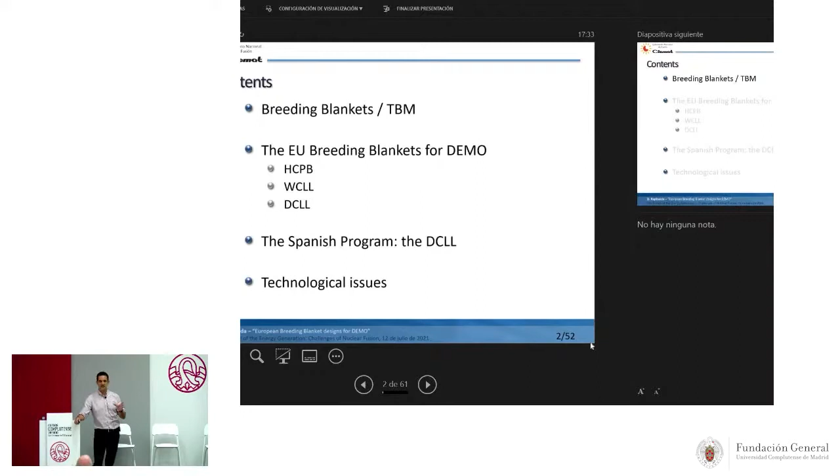So, what is quite important of this reaction? Deuterium is commonly found in nature as a percentage of hydrogen in water. So we have a lot of deuterium on Earth. We have this fuel for more than 10 to the 10 years. So no problem with that. But we have an important problem with tritium. Tritium is mainly an anthropogenic element. This means that it needs to be fabricated. We cannot find tritium naturally on Earth. We only have some small amounts of tritium in the high layers of the atmosphere by the action of cosmic rays. And the little production of tritium in the world comes from fission reactors and spallation sources.

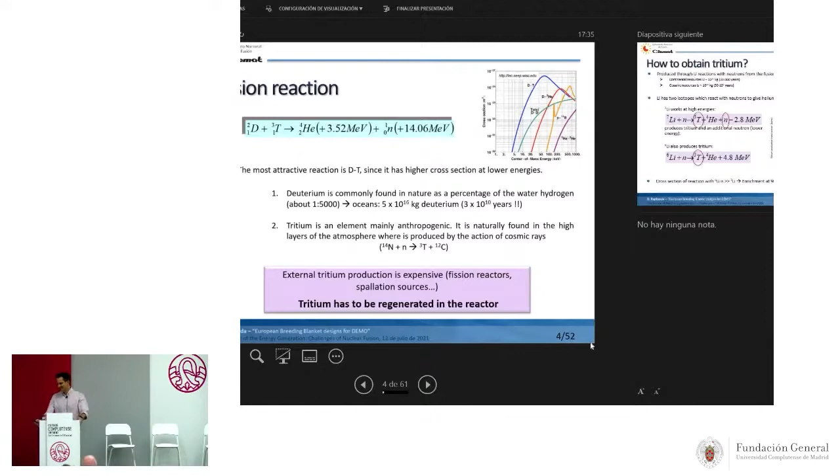So, for that reason, tritium has to be regenerated in the reactor. This is a key point that you have to keep in mind. But how to obtain tritium? What we do is to produce tritium through lithium reactions with the neutrons coming from the fusion reaction. These neutrons are of 14 megaelectron volts, so a very high energy, and this is also quite important. And why lithium? Because, firstly, we have a lot of resources of lithium around the world, both in the continents and the oceans. And secondly, because lithium has two isotopes with a good cross-section for producing tritium. This is the main point.

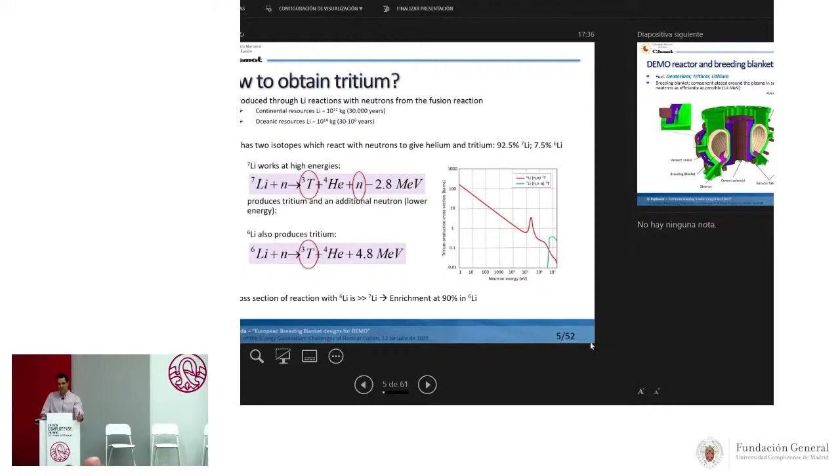And lithium-6 also produces tritium, and what is interesting here is that the cross-section of lithium-6 is really large. It's large at low energies, so this is good. But the problem, as I mentioned, is that naturally we find mostly lithium-7. So we need some enrichment in lithium-6 of this fuel.

Okay, so summarizing, the fuel that we use in fusion is deuterium, tritium, and lithium. We need a small amount of tritium to start the operation of the reactor, and after that we operate with lithium. We have deuterium plus tritium, we generate neutrons, and these neutrons impact, I will explain where, and we will produce tritium again. So, the breeding blanket.

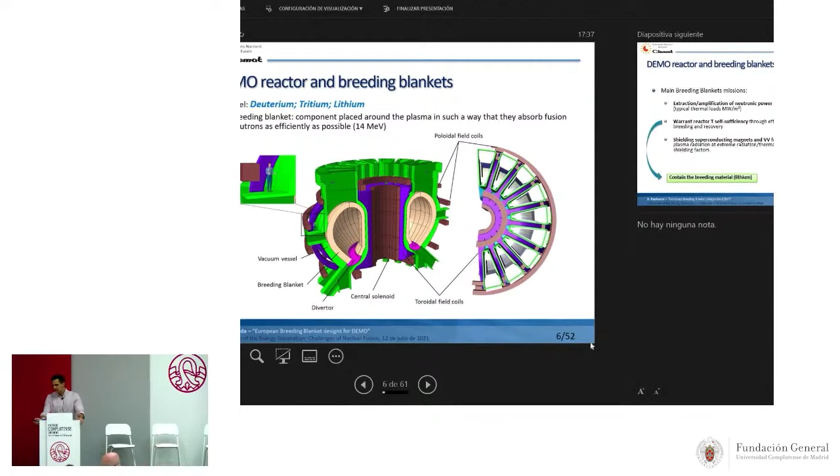In this slide, okay, it doesn't matter. Okay, this is a fusion reactor. This is how it looks. In the center of the reactor, we have the plasma, the deuterium and the tritium, and immediately surrounding the plasma, we have the breeding blanket.

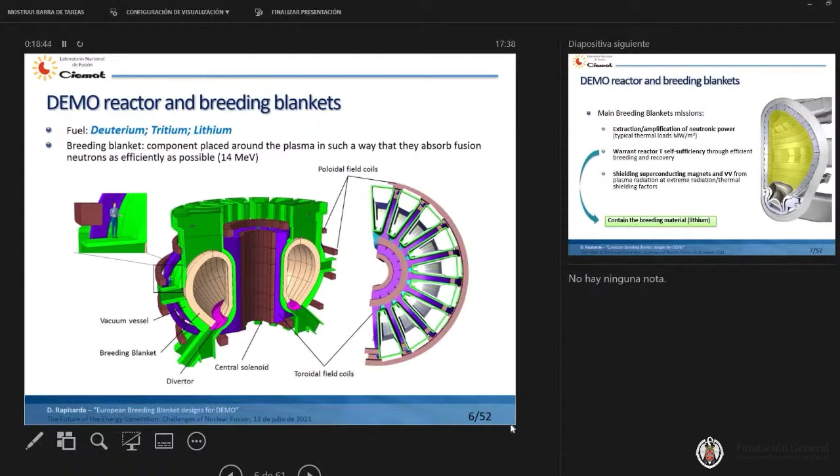This is the first component that the neutrons see, and this is quite important. So the neutrons produced inside the vacuum vessel, which is this green part of the reactor, go directly to this part, which is the blanket. This is the breeding blanket. And after that, we also have some magnets to produce the magnetic field and so on. Tomorrow in the talk by Joaquin Sanchez, you will obtain more information about that. But this is important: the blanket is the component which is placed surrounding the plasma.

So, the main missions of the blanket. The first one, and quite important, is to extract the power of fusion in order to produce electricity. This is the most important. And secondly, because we have this lack of tritium in the world, the second important objective is to produce tritium via lithium reactions with the neutrons. These are the two main functions. And we have an additional function, which is the shielding of all the components behind the blanket, in this case, the vacuum vessel and the TF coils, the toroidal field coils.

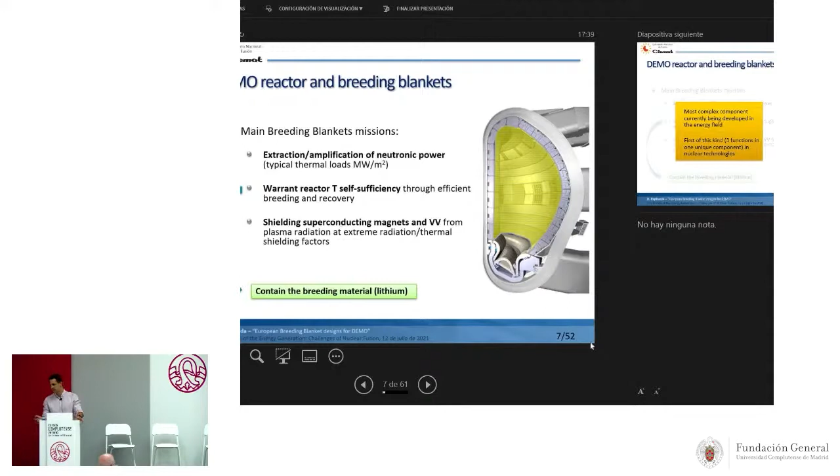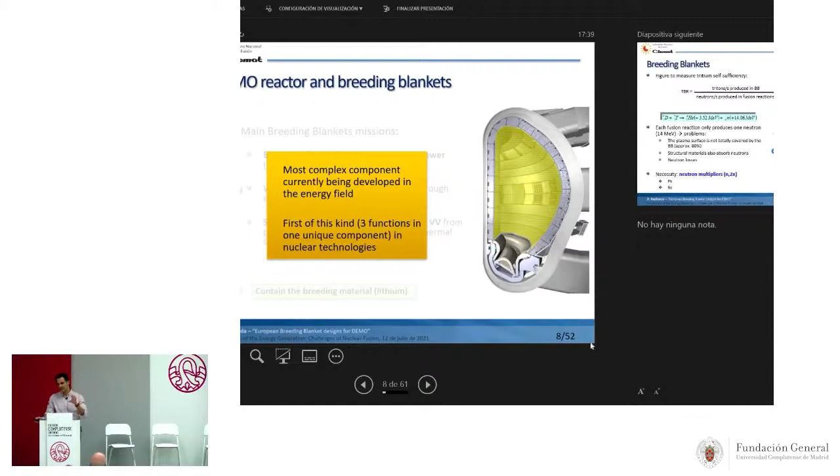So, since we have to guarantee the tritium self-sufficiency, remember this word, self-sufficiency, we want to be self-sufficient with the fusion reactions. The blanket must contain the breeding material, in this case, the lithium. And these three functions make the blanket the most complex component in the energy field. There are other components in other energy fields with some of these functions, but this is the only component that has the three functions in the same component, and this is quite important.

Okay, the breeding blanket and the TBR. The TBR is a number that we use to measure this tritium self-sufficiency. The TBR is the tritium breeding ratio, the amount of tritium that we produce inside the blanket versus the neutrons produced in the fusion reaction. It's a really important number, and you will understand easily why. I said that the deuterium-tritium reaction only produces one neutron, and this neutron has to directly impact the lithium blanket. And in this reaction, we only produce one tritium. So we have one neutron, one tritium.

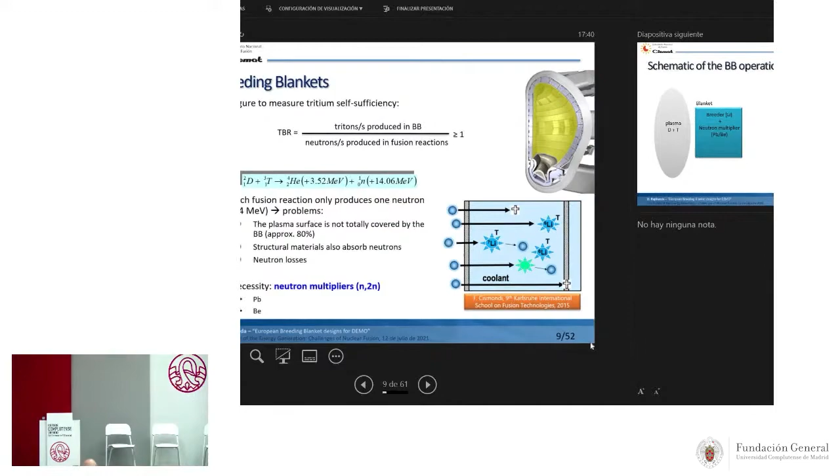This means that if we lose some neutrons on the way, we never will reach the self-sufficiency of the reactor. This is quite important. And we are going to lose neutrons. Why? Because the first thing is that, as you can see in this picture, the plasma is not completely surrounded by blankets. This is the blanket, and we have other components such as the divertor, or we have holes to install the heating systems or the diagnostics and so on. So at the end, we only have 80% of the surface of the plasma covered by blankets, and this means that we never will reach the self-sufficiency.

Second point, the structural materials also absorb neutrons. These neutrons will go directly to the steel, and the steel will heat up, and we lose these neutrons. And the third point is that we have neutrons with high energy, and these neutrons can pass through the blanket without any interaction with the lithium. So at the end, we never will reach the self-sufficiency only with the lithium. And for that reason, we need in the blanket what we call neutron multipliers, which simply is an element which can absorb neutrons and produce additional neutrons. And in our case, we use lead and beryllium.

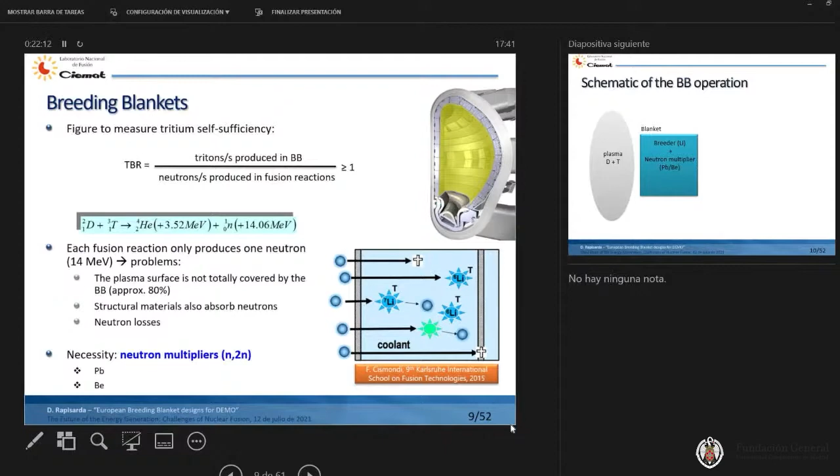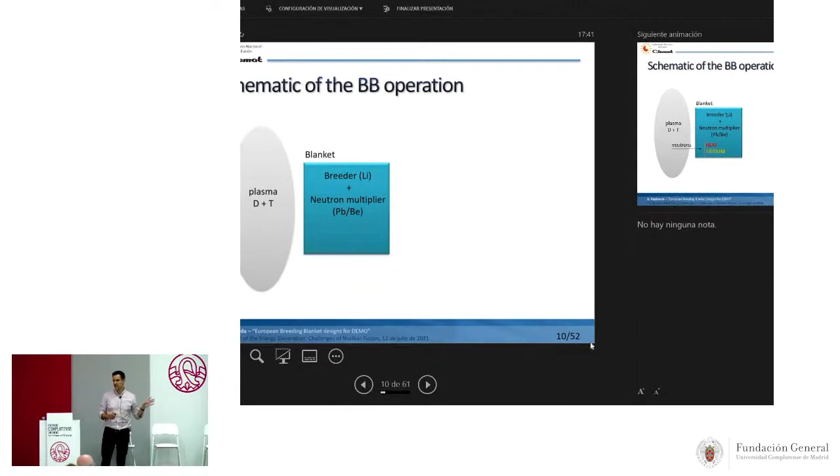Okay, in this slide, I just wanted to show a schematic of the operation of the breeding blanket. It's quite simple, but I think that it can help to understand well the problem. Here we have the plasma with the deuterium and the tritium. We produce neutrons, and here we have the blanket, okay? In the blanket, we have lithium, which is the breeder, and we have some neutron multipliers.

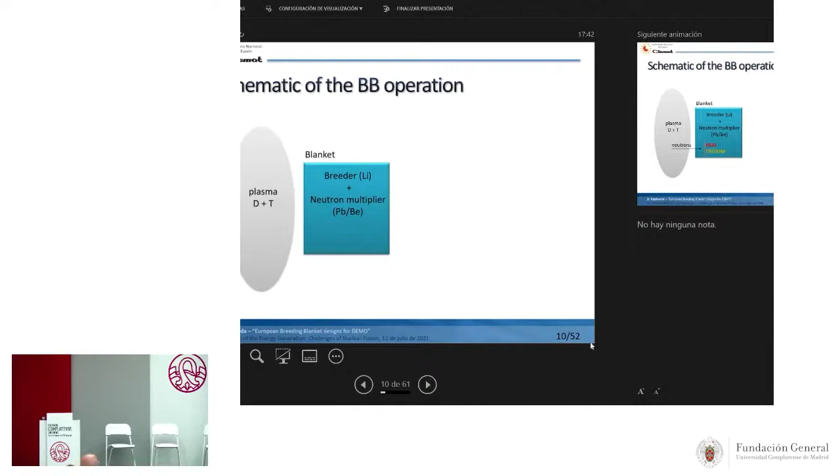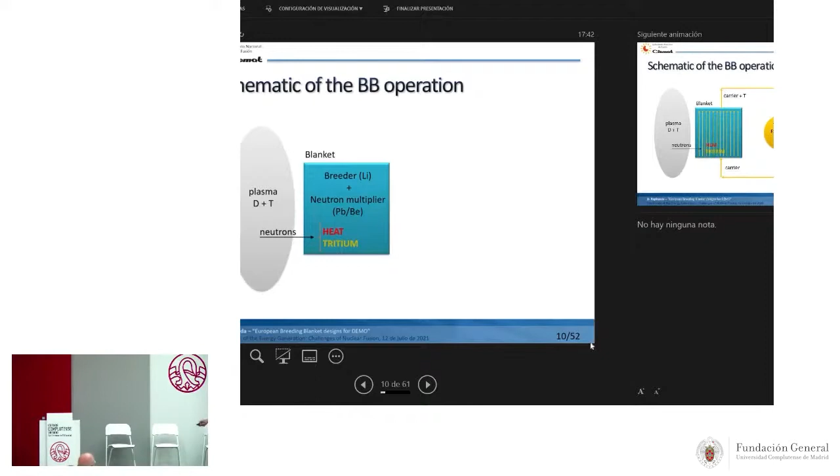So with a fusion reaction, we produce neutrons, which impact the blanket, producing heat and tritium, okay? And we have to extract the heat to produce electricity and the tritium for the self-sufficiency of the reactor. What happens with the tritium? We need a carrier to extract the tritium from the blanket and route this tritium to the tritium extraction system. The tritium extraction system is one of the most important subsystems in the reactor because we have to extract the tritium. This is quite important. So we have the carrier and we have the extraction system.

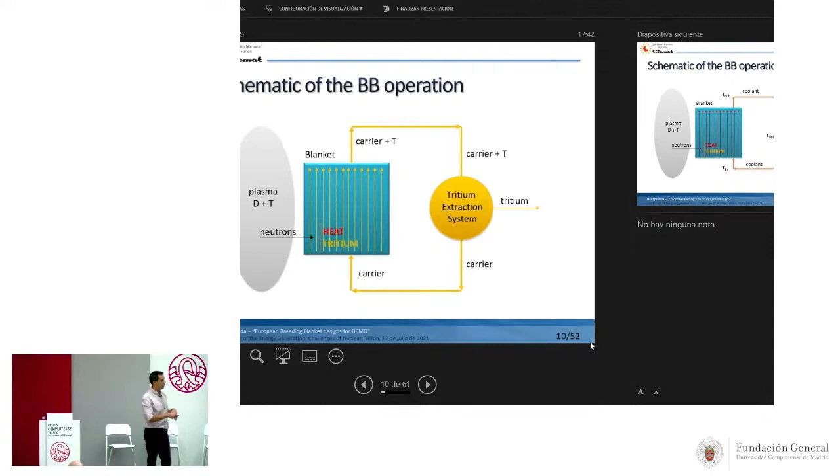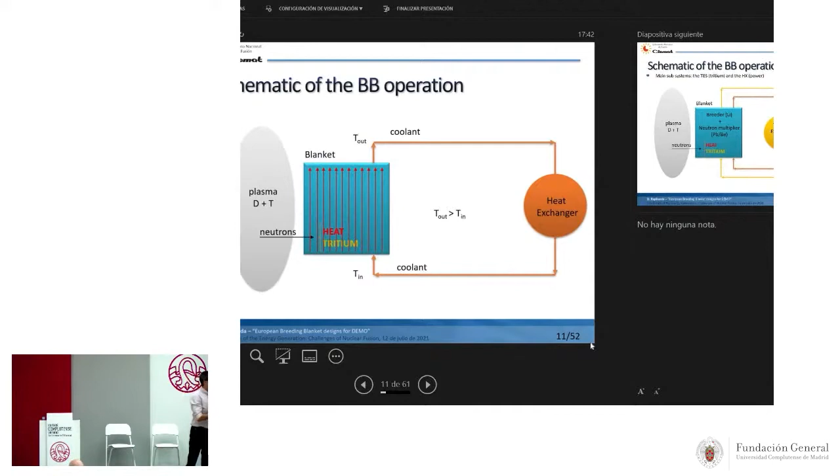And what happens with the heat? We also have to extract the heat, and for that we use a coolant. We have different kinds of coolants. I will go into this later. And we have the coolant directly connected to a heat exchanger and to the primary heat transfer system. Okay? So at the end, what is important is that we need a blanket with two important subsystems, which are the tritium extraction system for the self-sufficiency and the heat exchanger or the primary heat transfer system for production of electricity.

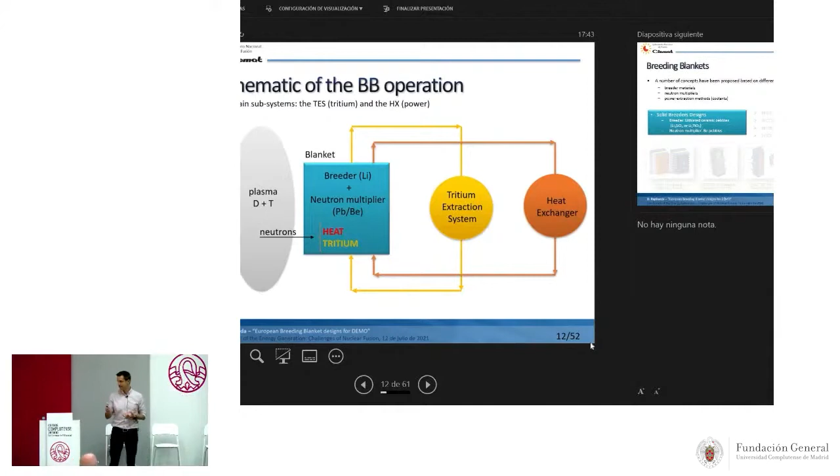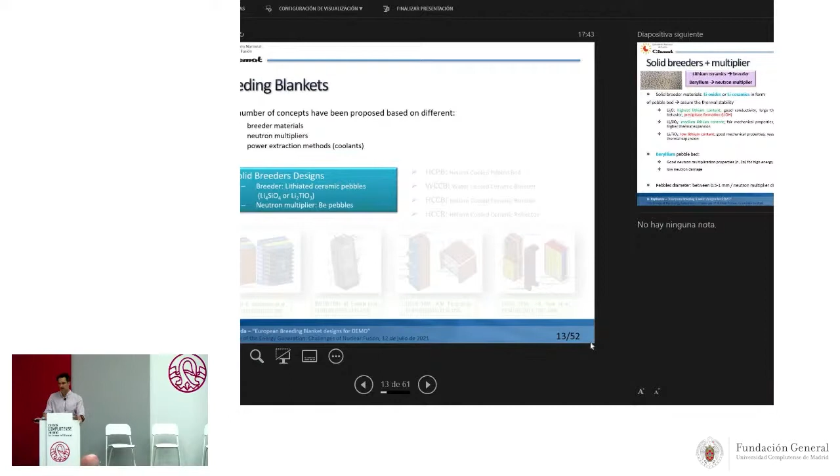Okay, during the last years, a number of blanket concepts have been studied based on different breeding materials, neutron multipliers, and coolants, okay? And the first family of blanket concepts is based on solid breeder designs. In this case, we use lithium ceramics as breeder and beryllium as neutron multiplier. We use solid breeder materials in the form of lithium oxides or lithium ceramics, and we'll also talk about the most accepted or most studied ones.

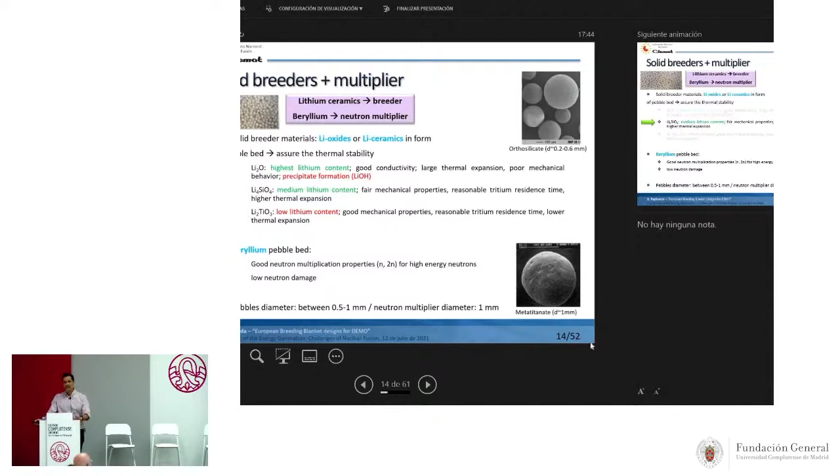The first one is the lithium oxide, which is really interesting because it has the highest lithium content, but it has a quite important disadvantage, and that is that it precipitates the formation of lithium hydroxide, and this means that at the end we are going to lose lithium and tritium, and we can't recover tritium easily. So for that reason, we go directly to lithium ceramics. And in the case of the lithium ceramics, we have studied two main ceramics, the lithium orthosilicate and the lithium metatitanate.

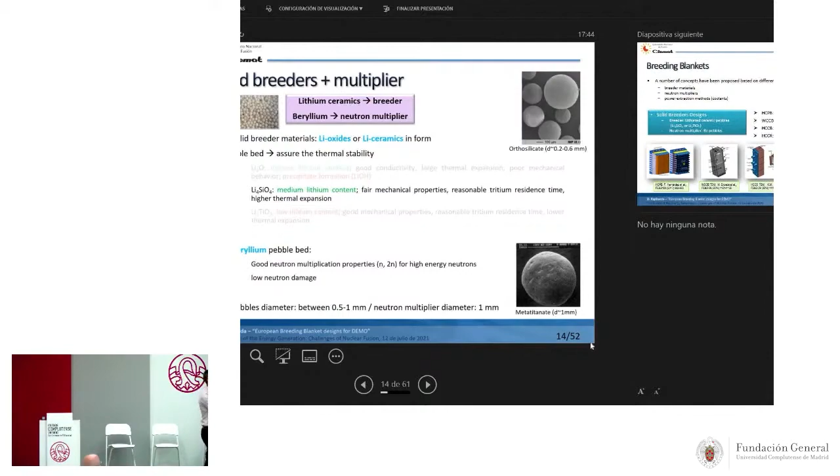They have different properties, but the most important difference is that the lithium orthosilicate has a higher lithium content than the lithium metatitanate, and also a higher thermal expansion. For that reason, I will focus on that, and I will explain it later in a slide dedicated to this material. And as I mentioned, beryllium in the form of pebble bed is used as neutron multiplier.

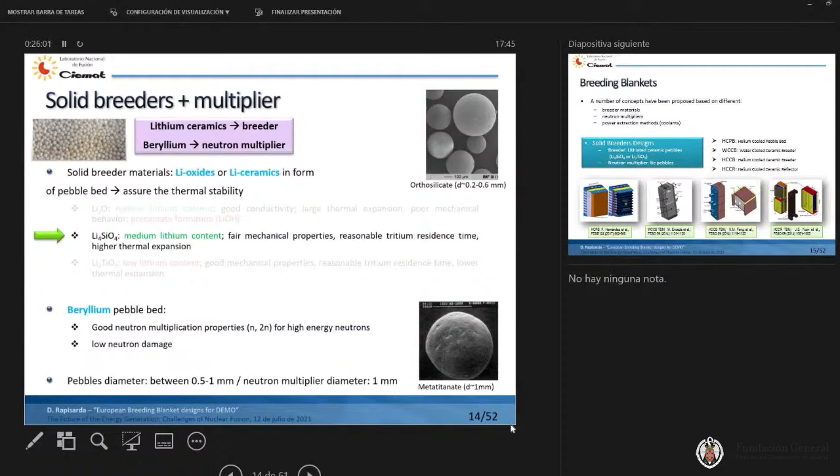Why beryllium? Because it has good neutron multiplication properties for high energy neutrons. I have not put the cross section here, but believe me, it has quite good properties. And quite important also, it has low neutron damage. The pebble diameters are between 0.5 and 1 millimeter for the breeder and about 1 millimeter for the neutron multiplier.

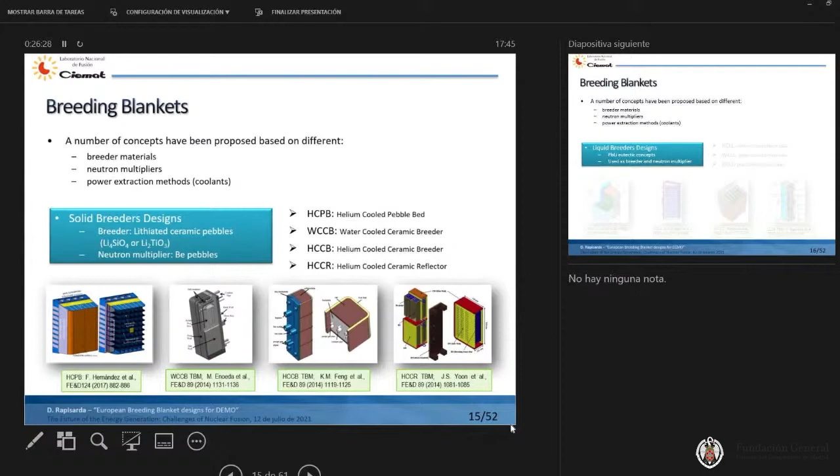Among the different solid breeder designs, a lot of concepts have been proposed, but these are the most common. The first one is the HCPB, which is a concept of pebble beds, but cooled with helium, okay? Helium-cooled pebble bed. The second is the water-cooled ceramic breeder, again a concept of a solid breeder, but in this case, the coolant is water. The helium-cooled ceramic breeder is almost the same, but developed by another country. And the HCCR, which is the helium-cooled ceramic reflector, uses a reflector to increase the number of neutrons.

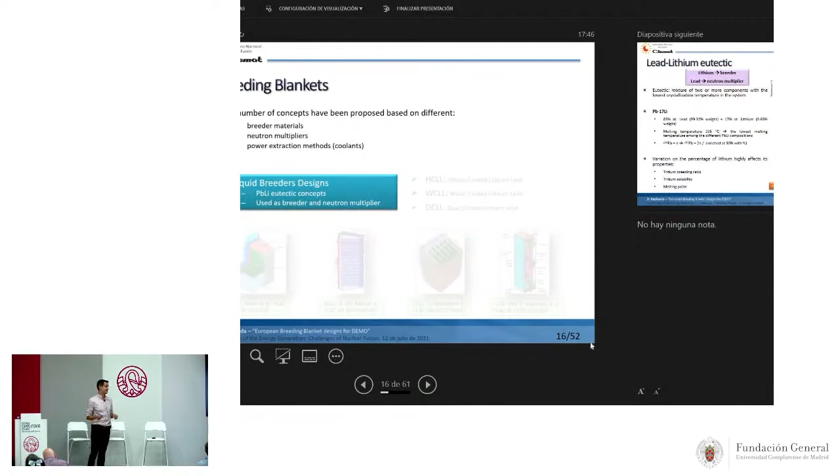The second family of blankets is composed of liquid breeders. In this case, what we use is the eutectic alloy of lead lithium, which is a metallic alloy, where the lithium acts as breeder and the lead is the neutron multiplier. Among the different eutectic compositions that this alloy can have, we have used this one, 83% of lead and 17% of lithium, because it presents the lowest melting temperature of all the compositions.

The melting temperature is 235 degrees, and this is easier to manage with the piping and so on of the system, and also to maintain between the limits of operation of the structural material, which in this case is Eurofer. And also the lead, because it's a good neutron multiplier. It has a good cross-section for neutron multiplication. And what is important here is that small variations of the percentage of lithium affect important numbers in the blanket, such as the tritium breeding ratio.

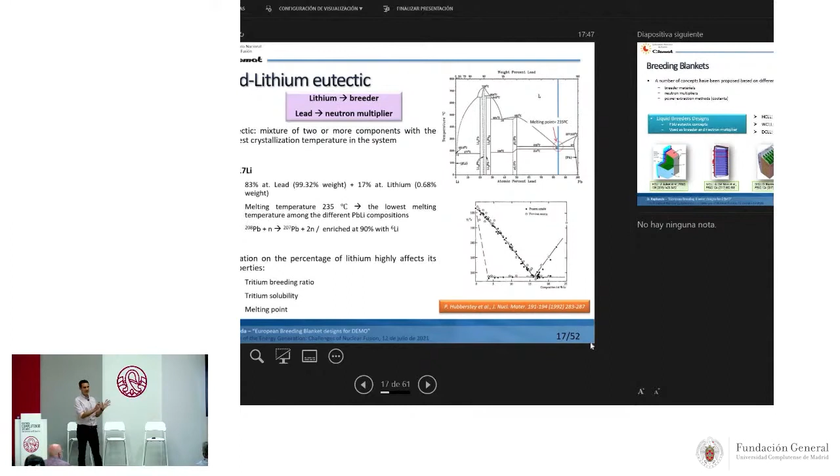The tritium breeding ratio, remember, the number of tritium atoms that we produce in the blanket versus the number of neutrons, the tritium solubility, and also the melting point. So maintaining the properties of the alloy is quite important. This is the most important message.

Okay, among the different liquid breeder designs that we have studied, we have the helium-cooled lithium lead, which is the tritium carrier. The tritium breeder is the lithium lead, and the coolant is helium. The water-cooled lithium lead, in this case we use water as coolant, and the dual coolant lithium lead. And I will talk on this blanket in upcoming slides.

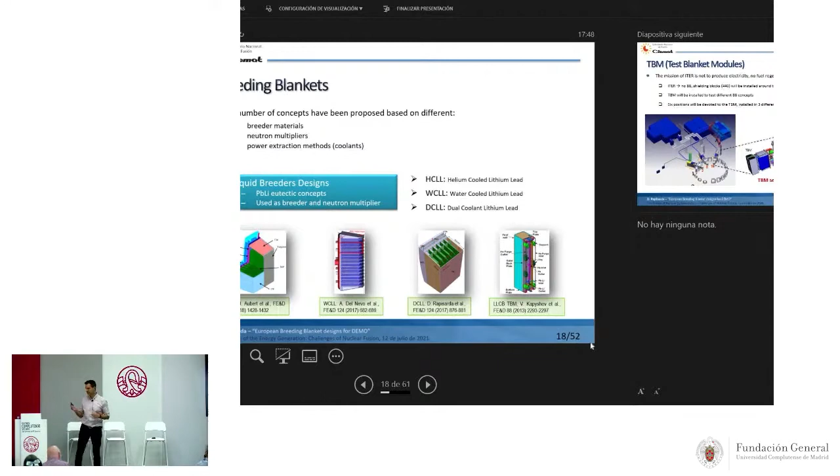The test blanket modules. Okay, as Angel explained in his talk, the mission of ITER is not to produce electricity and is not to breed the tritium. The mission of ITER is to have experiments to demonstrate the fusion reactions and so on, but we don't want to produce electricity. For that reason, in ITER, we will not have blankets.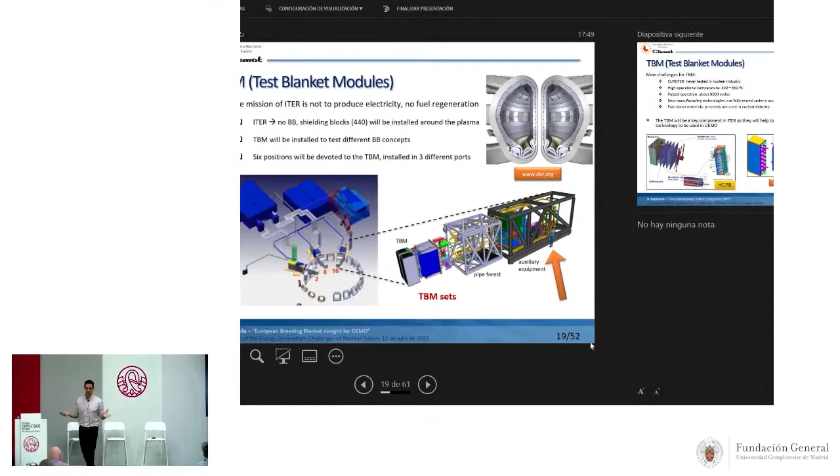Instead of the blankets, we will have, you can see there in that picture, shielding blocks, around 440 shielding blocks. And these blocks will be installed around the plasma. And only in certain positions, we will install TBMs, which are test blanket modules, which will be mock-ups of the blankets that we want for DEMO, adapted to ITER, okay? And in ITER, we will test 6 different blankets installed in 3 different positions. But the message is, in ITER, we will not have breeding blankets, we will have TBMs, which are mock-ups to test the breeding blankets, okay? The rest of the first wall is a shielding component.

The main challenge for the TBM in ITER, the first one, is to test the reduced activation steel, which is Eurofer, which has never been tested in the nuclear industry and will be tested also in DONES. This is quite important, but in ITER we will also get some ideas of the behavior of the steel in a fusion environment. To work under high operational temperatures between 300 and 550 degrees Celsius, they will operate in pulsed operation. We will test new manufacturing technologies, and we also test the functional materials, in this case the lead lithium and the pebbles. So the TBM will be a key component in ITER because they will help to identify the most promising technologies for DEMO.

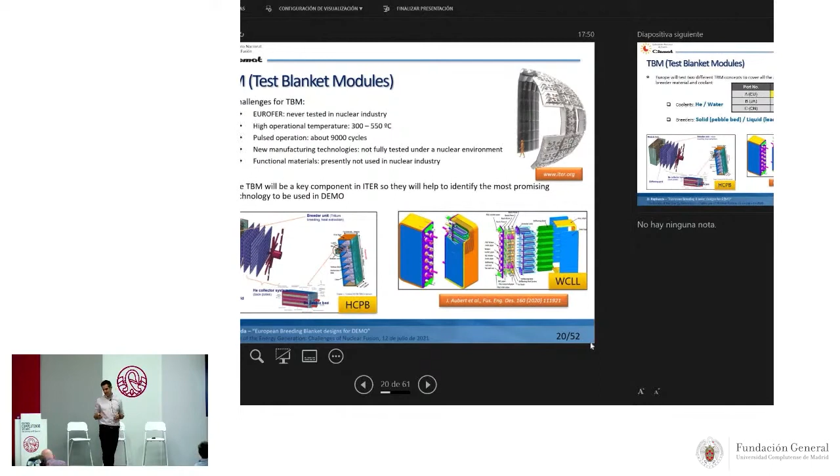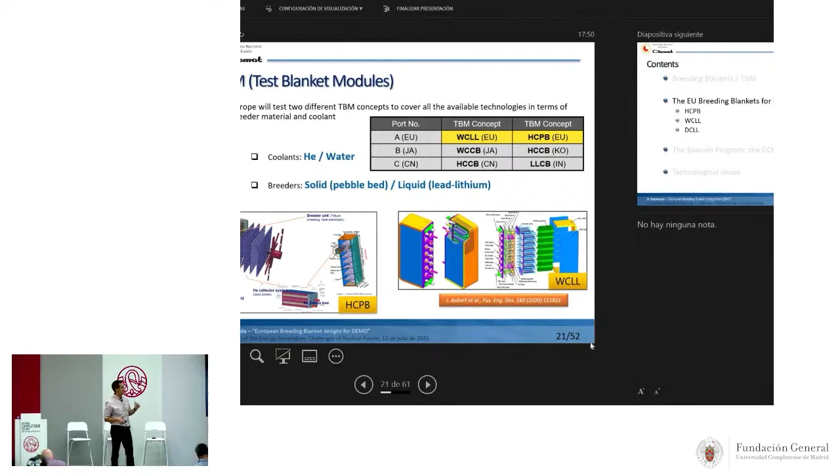And what happened in Europe? In Europe, we will test 2 different TBMs, okay? And these 2 TBMs will try to cover all the technologies available in terms of coolant and breeder. We will test coolant, we will test helium, and we will test water. And in terms of breeder, we will test the pebble bed and the liquid metal. So the 2 TBMs that are being considered are the WCLL, the water-cooled lead lithium, and the HCPB, the helium-cooled pebble bed. So we cover all the technologies for the breeding blankets.

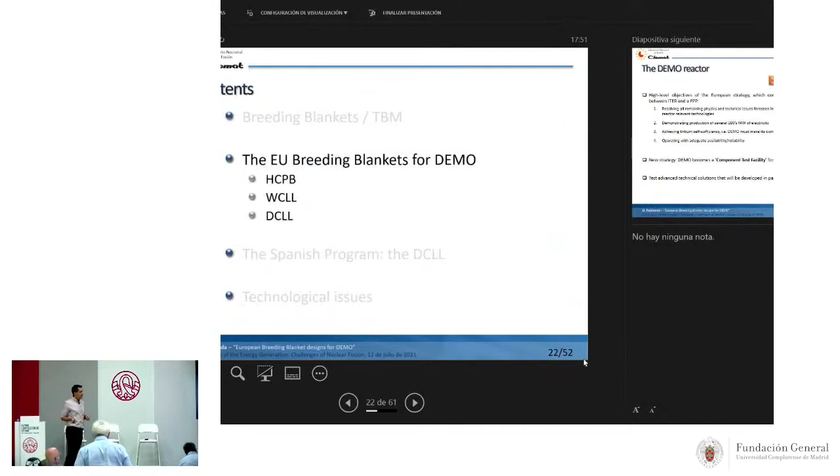Okay, now I will focus on the European program for the breeding blankets. So I will talk a little bit about DEMO, the high-level objectives of the European strategy, which considers DEMO as the only step between ITER and the fusion power plant, are firstly to resolve all the remaining physics and technical issues foreseen in the plant. Secondly, to demonstrate the production of electricity. Of course, to demonstrate the self-sufficiency of the reactor to produce tritium, and to operate with adequate availability and reliability.

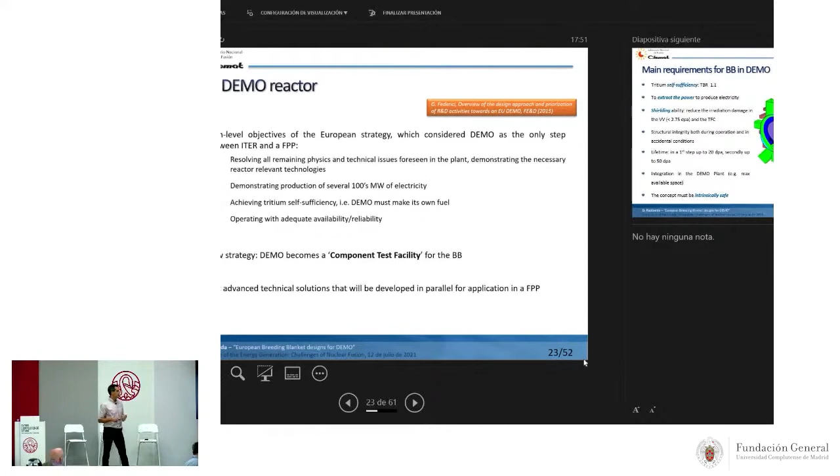Now, we have a new strategy which considers DEMO as a component test facility for the breeding blankets. This means that we will use DEMO to test the breeding blanket. And we also will test advanced technical solutions in parallel for the application for the fusion power plant. The main requirements of the breeding blankets in DEMO. The first one, again, the tritium self-sufficiency. These are the 3 main functions of the blanket, okay? Second one, to extract the power to produce electricity.

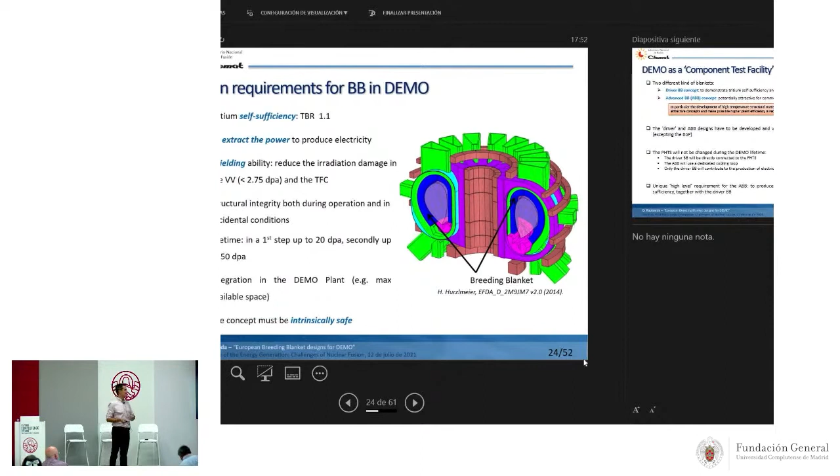Third, the shielding ability. We also must have an adequate structural integrity, both during operation and in accidental conditions. Considering the lifetime, we will have a first set of breeding blankets able to work up to 20 dpa. And after that, we will install a second set of breeding blankets to work at higher dpa, 50. Of course, another important requirement is the integration in the DEMO plant. For example, we only have this blue space dedicated for the blanket, so we have to design our blankets according to this limitation, also the piping in the plant, and so on. And of course, the concept must be intrinsically safe.

In DEMO, we will install 2 different kinds of blankets. This is new from 2 years ago. The first one is the driver blanket, and the second one is the advanced blanket. The driver blanket has to demonstrate the tritium self-sufficiency and the power extraction, while the advanced blanket is a concept which is potentially attractive for commercial reactors.

So in DEMO, in the fusion reactor, we will have a lot of blankets, and only a small fraction of all the blankets will be dedicated to the advanced blanket. Okay? For that reason, because both blankets will be installed in the same machine, they have to be developed at the same level of detail. This is quite important. Also quite important, the driver blanket will be directly connected to the primary heat transfer system. Okay? But the advanced blanket will use its own cooling loop.

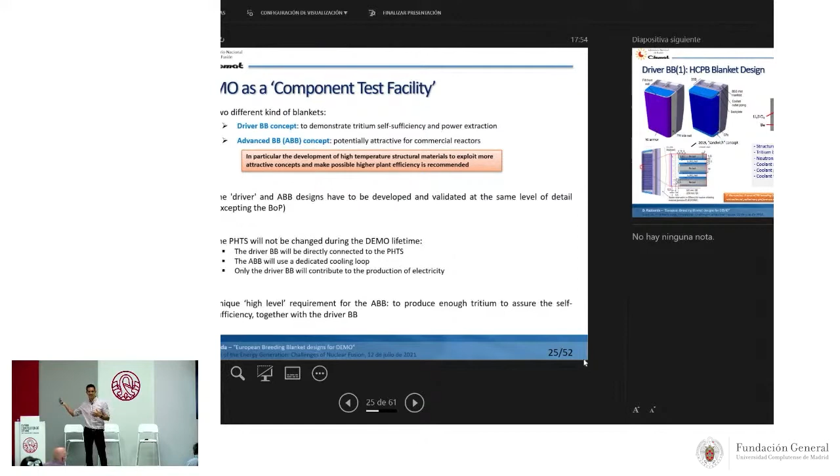This means that only the driver blanket will contribute to the production of electricity, because the advanced blanket can use a coolant which is completely different to the driver one, and we cannot merge this in the same primary heat transfer system. So this is a high-level decision. But the unique high-level requirement for the advanced blanket is that it has to produce tritium, and it has to contribute to the self-sufficiency of the reactor, because one of the missions of DEMO is to demonstrate the tritium self-sufficiency. That is, to produce enough tritium so we don't depend on external sources from the reactor.

The first driver blanket that we are considering is the HCPB. You will see that we are considering two driver blankets, the HCPB and the WCLL, and this is because they are in line with the program of ITER, with the TBM. As I explained, we want to cover in ITER all the technologies: water, helium, pebble bed, liquid metal. So the blankets that will be tested in DEMO are coherent with the TBM tested in ITER. So the driver blanket HCPB, helium-cooled pebble bed.

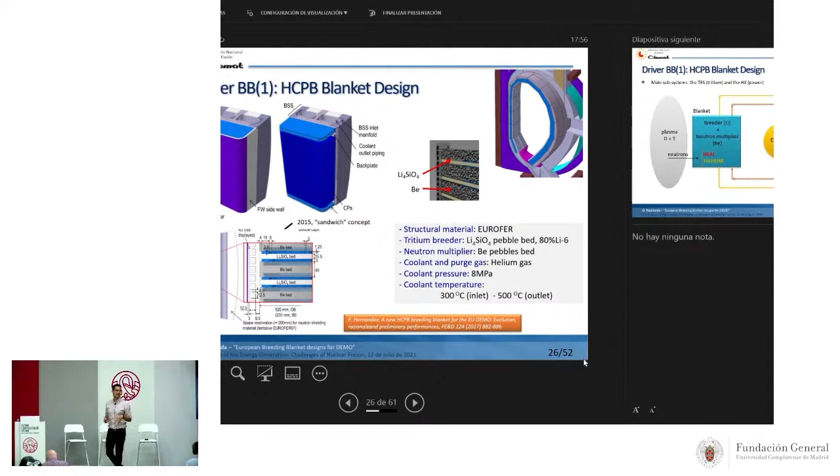In all the cases, the structural material is Eurofer, which is the reduced activation steel. In this case, the tritium breeder is the lithium orthosilicate in the form of pebble bed, and the neutron multiplier is beryllium. You can see in this picture that they are arranged in the form of a sandwich. We have a lot of beryllium, a small slice of breeder, and so on. The coolant is helium at 8 megapascals, and the inlet and outlet temperatures of this coolant are 300 degrees Celsius and 500 degrees Celsius.

And what is important here, I go back to the schematics of the breeding blanket. We need a tritium extraction system and a heat exchanger. For the HCPB, this is quite important because how can we extract the tritium? Because we have the pebbles of lithium, the neutrons impact the pebbles, we produce tritium inside the pebbles, and we need to extract this tritium from the blanket. So for that, we use an additional loop of helium, which is used as a purge gas. Okay? It's a carrier, a gas which goes through all the pebbles and carries all the tritium to the tritium extraction system. And additionally, we have another loop of helium to extract the heat.

Okay, and this is another scheme of the same, more complex. And this is the second driver blanket. This is the WCLL. In this case, we have as breeder the liquid metal, the lead lithium, and as coolant we have water, at these conditions. I will explain right now. In this case, we also use Eurofer as a structural material. In this case, the neutron multiplier is the lead lithium itself. And for the coolant, which is water, and this is quite important, we use double-wall tubes.

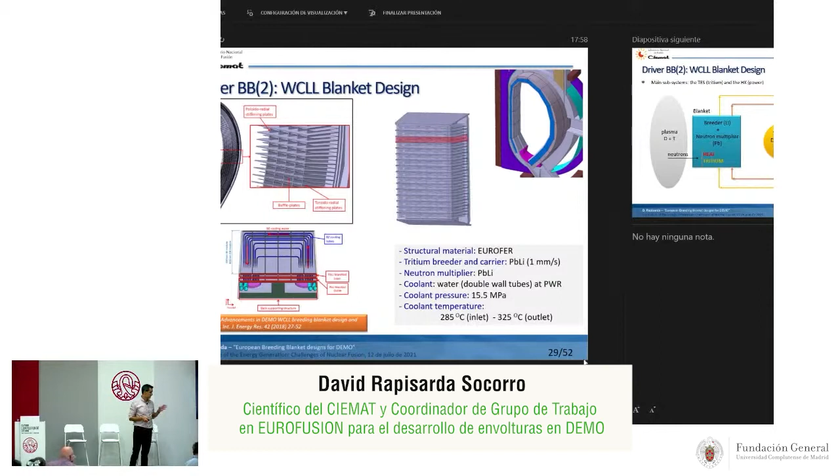Why? Because we don't want the lead lithium and the water to interact. So we need a double wall to avoid, imagine if the first tube is broken, you can spill some water into the lead lithium. So we put two tubes, one inside the other, to avoid this problem. The coolant pressure is 15 megapascals, and the temperatures are slightly lower, 285 degrees at the inlet and 325 at the outlet.

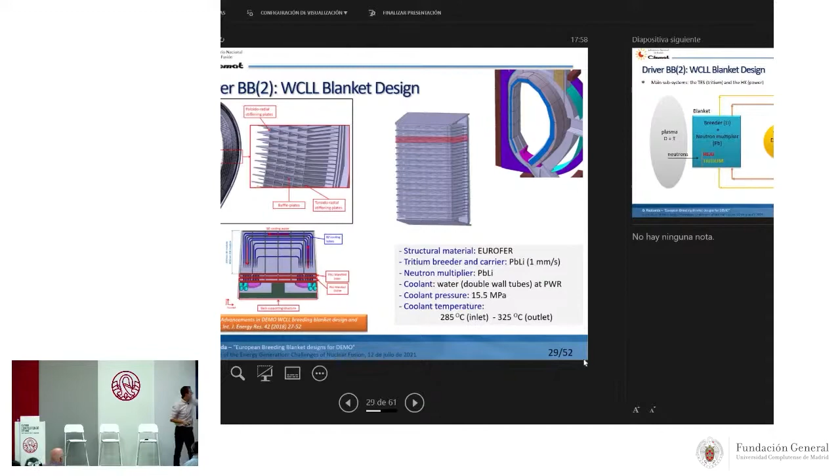In this case, the lead lithium, you can see here the blanket. Remember that this is the torus of the machine. This is the blanket. The lead lithium flows vertically, covering all these plates, in this direction. And the water flows in, this is a cross-section in this part, at this level. And in this cross-section, you can see the disposition of the different tubes with the water. The concentration close to this part, which is closer to the plasma, is because the neutrons impact more in this part, so there is more heat here, and we have to extract this heat, and for that reason we have more tubes. It's quite simple. Okay.

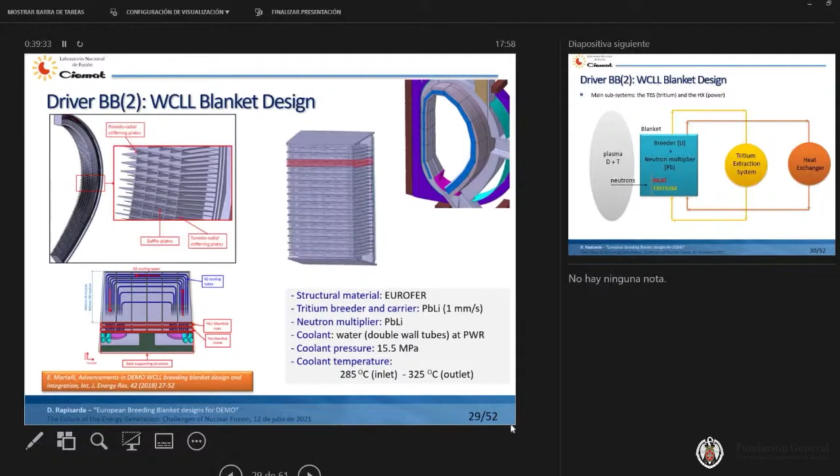Going back to this slide of the main subsystems, in this case the breeder is lithium, the neutron multiplier is lead, the coolant is water. For the tritium extraction system, we have a dedicated loop of lead lithium. In this case, the lead lithium is the carrier because we produce the tritium in the lead lithium and it goes directly to the tritium extraction system. And the coolant is the water, which goes through this loop to the heat exchanger. Okay, this is more or less the basics of this blanket.

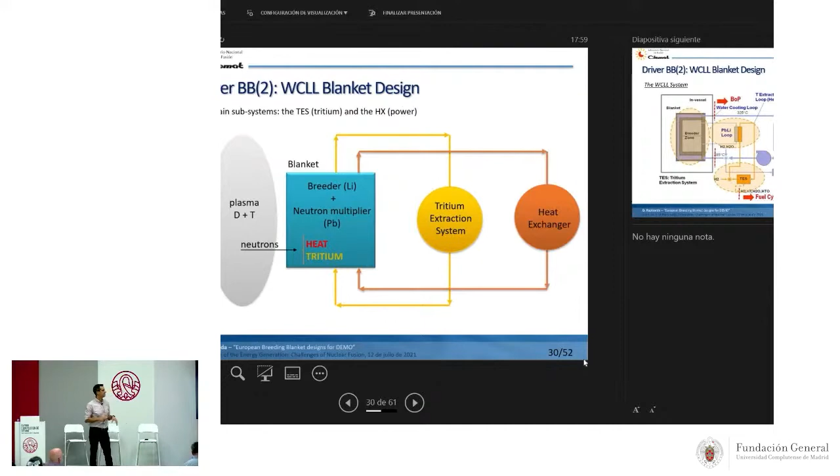And finally, we have one of the advanced blanket designs that we are studying, which is the dual coolant lithium lead. In this case, the structural material again is Eurofer. The tritium breeder and carrier, again, as in the case of the WCLL, is the lead lithium, and the neutron multiplier is the lead. But in this case, there's a quite important difference. I'm going to the next slide, and we'll go back to this one.

In this case, the lead lithium acts also as coolant. We don't have any additional coolant. So this means that the neutrons deposit all the energy on the lead lithium, producing heat and producing tritium, and we route this lead lithium through the tritium extraction system, and after that, through the heat exchanger. So in this case, the lead lithium is the main coolant and the tritium carrier. And this is an important difference compared to the WCLL.

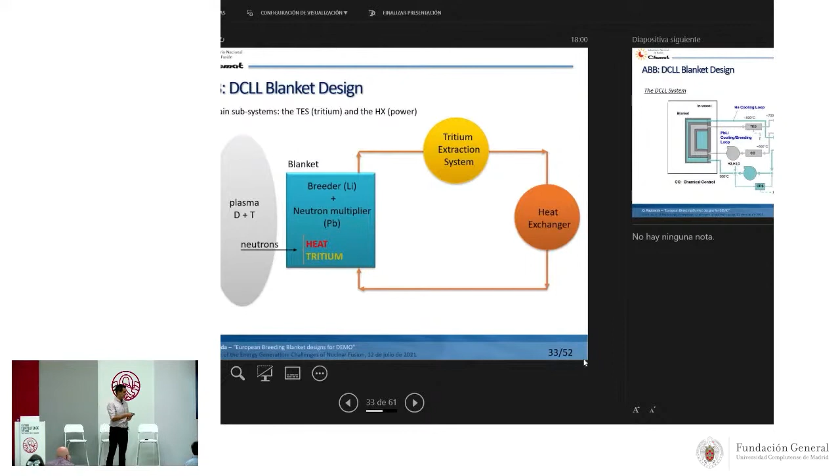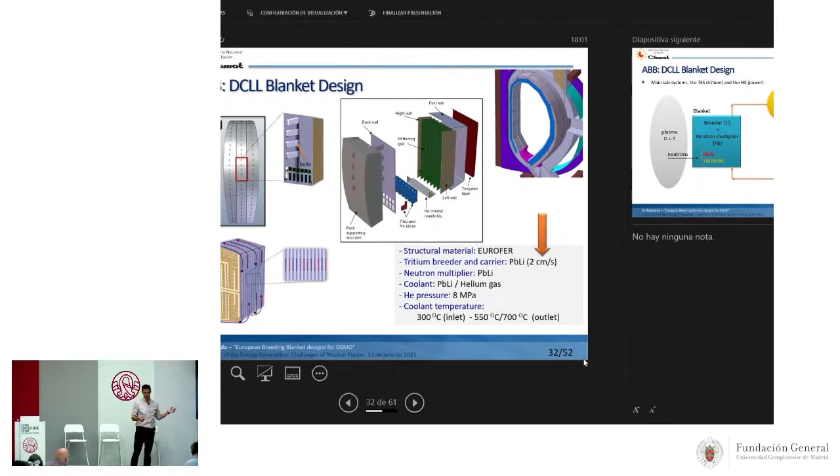But why dual coolant? Because we use an additional coolant for cooling the first wall. The first wall is one of the most important components of the blanket, the first component that the neutrons and the plasma radiation see. So in the end it is the component that receives the most important thermal loads, the most important radiation, and so on. So it's a quite important component. And for that reason, we use an additional coolant, which is helium, to cool this first wall. And for that reason it is the dual coolant lithium lead.

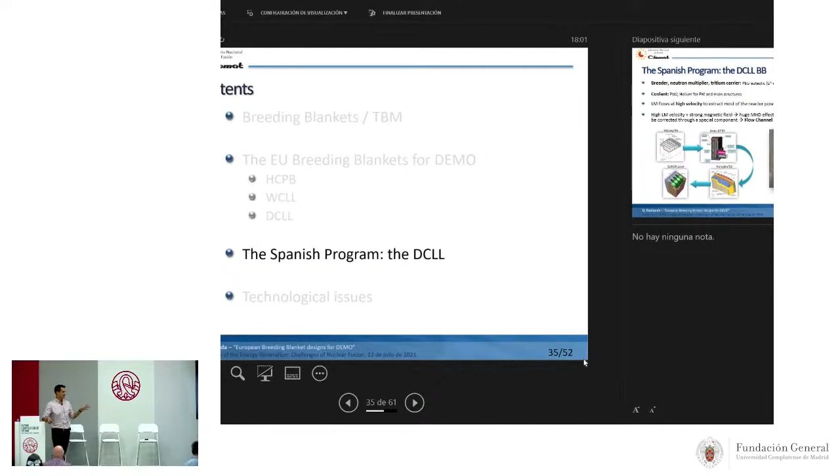So the Spanish program, I think that I'm more or less on time. The Spanish program is the dual coolant lithium lead, and this is the reason I left this advanced blanket for the end. We have been working during the last 10 years on this interesting blanket, which started in Germany. After that, in the US, there was a very interesting program on dual coolant lithium lead also, and in some way it came back to Europe in the last 5 years, and was developed here, led by CIEMAT. I will explain some characteristics of this blanket.

As I mentioned, the dual coolant lithium lead uses the eutectic alloy of lead lithium as tritium breeder, neutron multiplier, and tritium carrier. The coolant is lead lithium mainly, but also helium is used for cooling mainly the first wall, but also some parts of the structure.

One important characteristic of the dual coolant lithium lead, the DCLL, is that the liquid metal flows at high velocity because we want to extract most of the reactor power. If we don't route the liquid metal at high velocity, it will heat up and heat up due to the neutron interaction, and we don't want that. So we have to flow the liquid metal at high velocity, and this has an additional consequence. The immediate consequence is that we have a metal moving in a strong magnetic field produced by the coils, and we produce huge magnetohydrodynamic effects. Magnetohydrodynamic is a combination between the magnetic field and the hydraulics of the liquid metal. To avoid this, and I will go into the technical issues later, the DCLL uses a quite important and special component. It's a ceramic component called the flow channel insert.

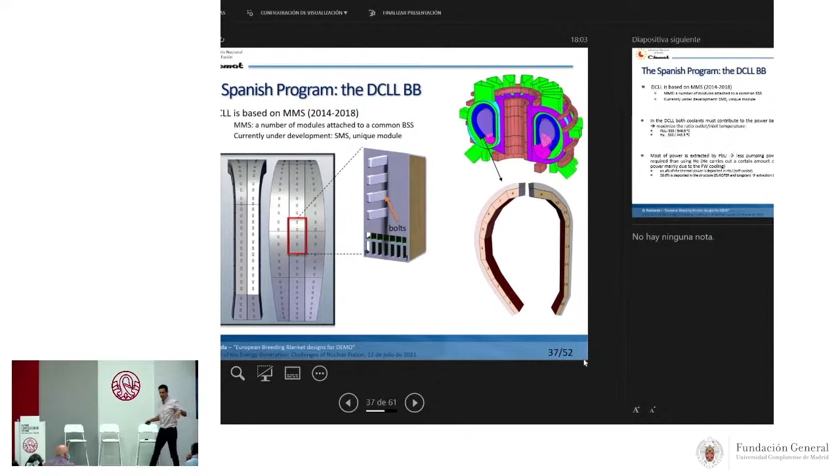The DCLL is based on a multi-module segmentation architecture, which means that we have a number of modules like this, as you can see here, attached to a common back supporting structure. We have several modules, and inside each of the modules, I will explain later.

As explained, in the DCLL, both coolants must contribute to the power balance, maximizing the ratio between the outlet and the inlet temperatures, but most of the power is extracted by the lead lithium. This is interesting for the efficiency of the plant, because for pumping the lead lithium we need lower pumping requirements than for pumping helium, for instance.

So this makes the DCLL probably one of the most interesting concepts for the long term for installing in a fusion reactor. The main advantages are that we have a wide design margin thanks to the dual cooling system. We can play a little bit with these two coolants. We have a low tritium inventory. We don't have any issue related to water because we cool with helium.

Of course, I'm making a comparison with WCLL, but it can work for the presently available nuclear materials, and in particular for Eurofer, and it can be used for high temperatures, which at the end will mean that we will have a higher plant efficiency. And this is, at the end, the key of the fusion reactors.

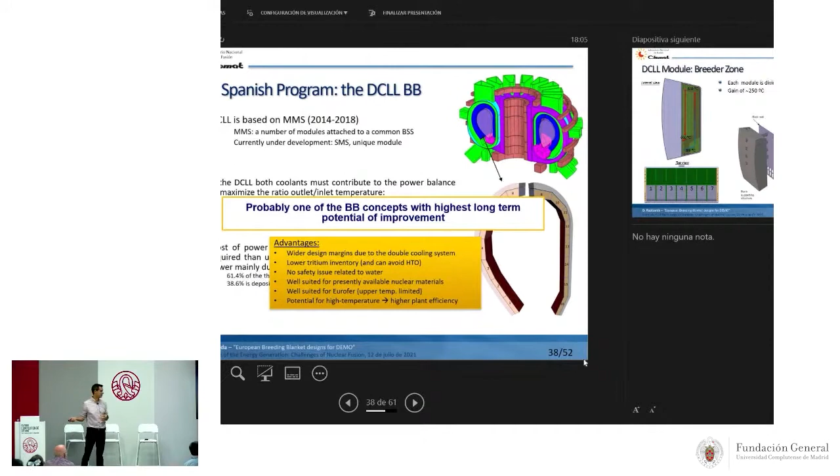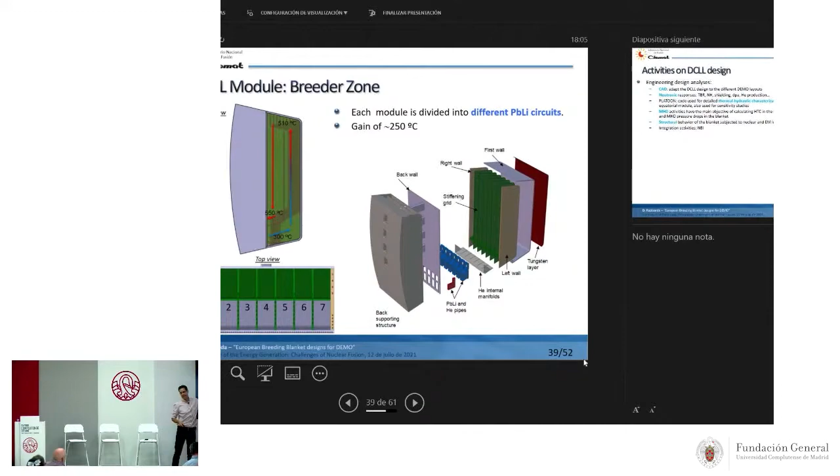Each of the modules is internally divided into different lead lithium circuits. Okay? The lead lithium enters through the lower part at 300 degrees Celsius. Here we have most of the gain due to the neutron interaction. We have nuclear heating here, okay? It makes this route and exits the module in this part at 550 degrees Celsius.

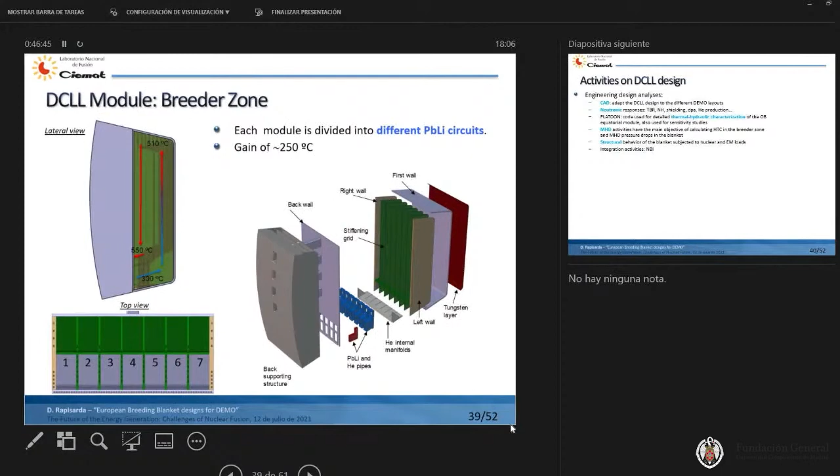And here you can see a breakdown of the blanket. This is maybe not so important, but the most important thing is that we have here different circuits of the liquid metal, and here what we call the first wall, which is composed of a plate of Eurofer covered by a tungsten layer.

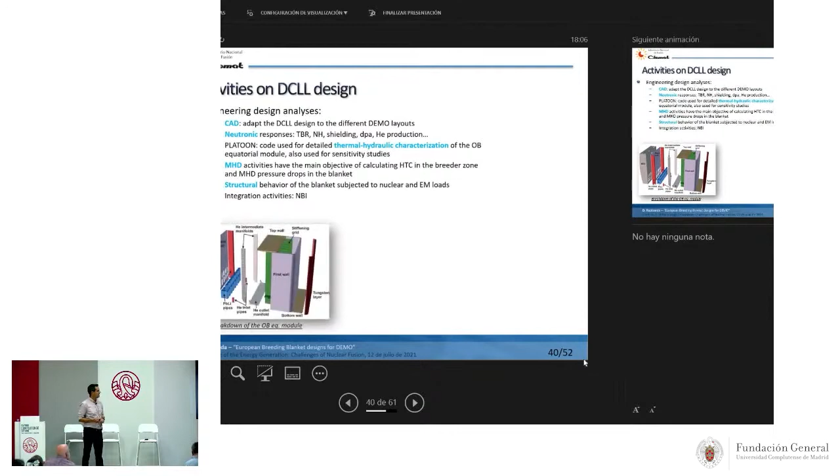Okay, what we do in CIEMAT is the CAD design of the DCLL, which we have adapted to the different DEMO layouts developed by Europe. We also calculate some neutronic responses, the most important figures such as the TBR, the nuclear heating, the damage in the components, and so on.

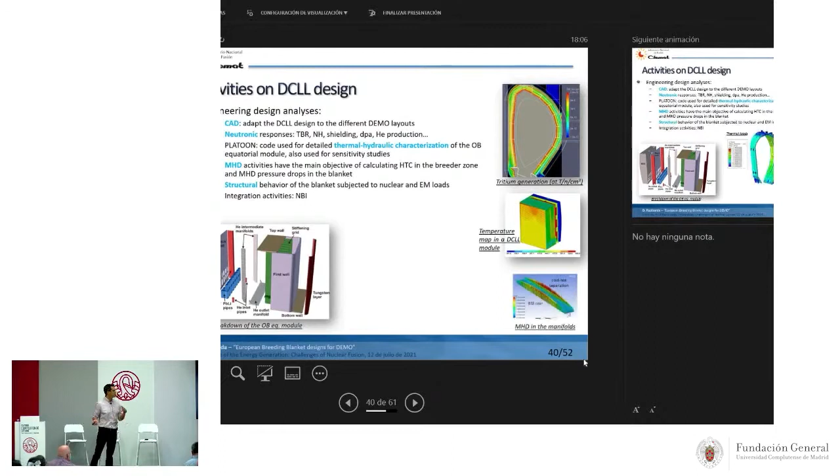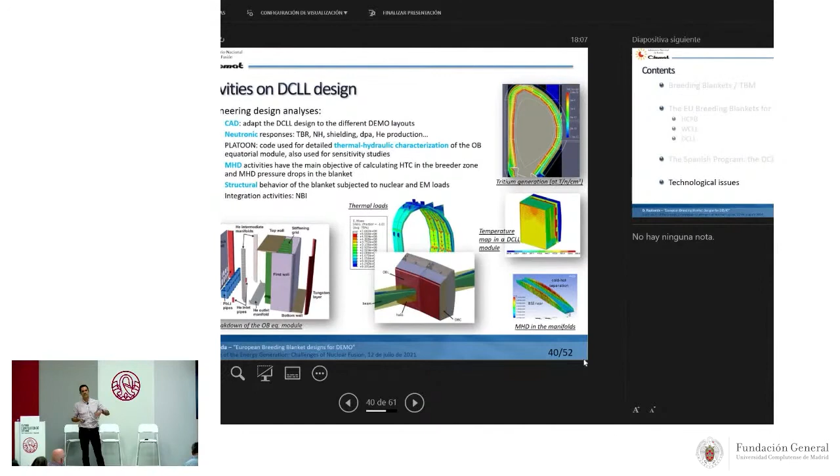Also, we perform thermal hydraulics calculations to obtain the temperature of the different components of the first wall, the temperature at the inlet and the outlet of the liquid metal. Also, we perform MHD activities, okay, mainly to estimate the pressure drop in the circuits. This is the immediate consequence of the MHD. We also perform structural behavior of the blankets, and of course integration activities such as the integration of heating systems, the piping layout, and so on.

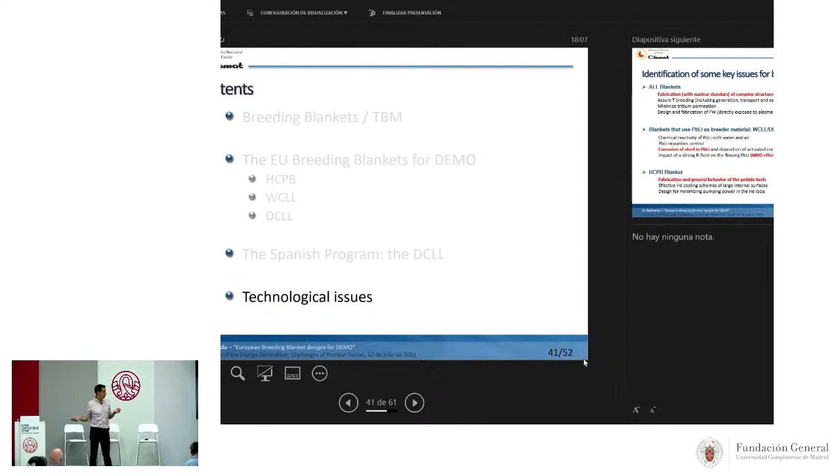Okay, and this is, in a few words, the work that we carry out here in CIEMAT, in Spain. And now I will talk to you about some technological issues that are the drivers for the R&D program on breeding blankets. The first one is the fabrication, because we have to fabricate, and this is quite important, with nuclear standards, these complex structures. And this is common to all the blankets.

Of course, we have to assure the tritium breeding. We have to minimize the tritium permeation. I have not talked about tritium permeation, but tritium can permeate through everywhere. So at the end, we will have the problem of tritium not only in the blanket, but also in the subsystems, in the tritium extraction system, in the heat exchanger, in the piping, and so on. So we have to avoid or minimize this tritium permeation. And we have to design and fabricate the first wall. We have to withstand about 1 megawatt per square meter, which is a lot.

Some issues related to blankets that use the liquid metal. The first one is to avoid the chemical reactivity of the liquid metal with water and with air. Next, we have to control the impurities in the liquid metal. Also, another important issue is the corrosion of the structures due to the interaction with the lead-lithium, and the MHD effects. And in particular, for the other driver blanket, which is the HCPB, we have some issues such as the fabrication and the general behavior of the pebble beds.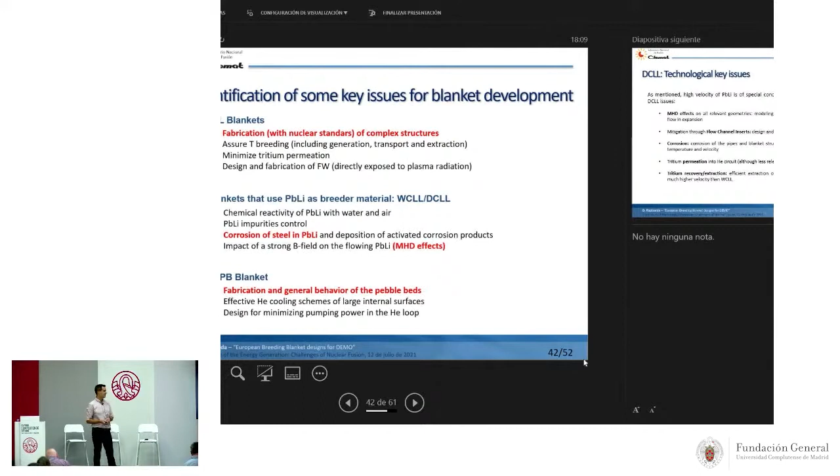Quite important, remember that the coolant in this case is just helium, only helium, and to pump helium is really expensive in terms of electricity. It has some cost, so we have to develop effective helium cooling schemes for these large internal structures. And of course, we have to design the circuit for minimizing the pumping power.

And now, some technological issues related to the DCLL. Because as mentioned, the main characteristic of the DCLL is the high velocity of the liquid metal. But this is also the main problem. Firstly, because this brings MHD effects, which can be mitigated through these flow channel inserts. I will show you now what the flow channel insert is.

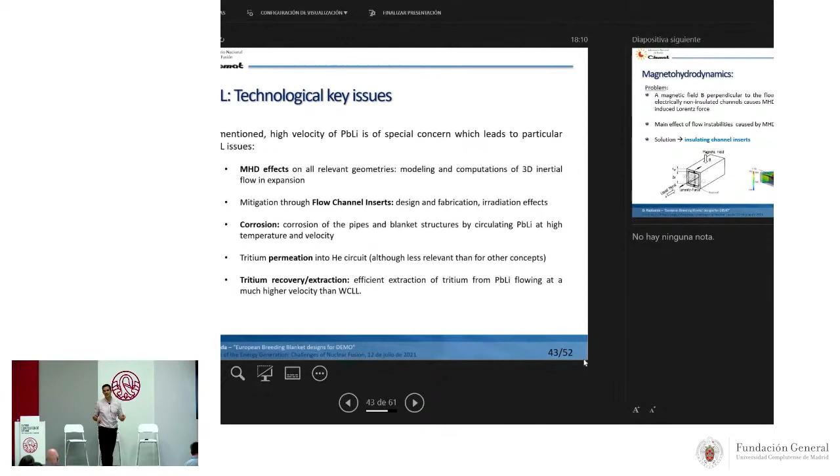The corrosion is also due to the velocity of the liquid metal, not only the velocity, but the combination between temperature and velocity of the liquid metal. Tritium permeation into the helium circuits, and the tritium extraction, quite important. A few slides about each of the topics.

First one, magnetohydrodynamics, the interaction between the magnetic field and the movement of the liquid metal. The problem is that we have a very intense magnetic field, between 5 and 9 Tesla, depending on the place of the reactor, which is perpendicular to the flowing liquid metal. And in this case, this causes MHD effects, which at the end are pressure losses in the circuit. This is the main problem.

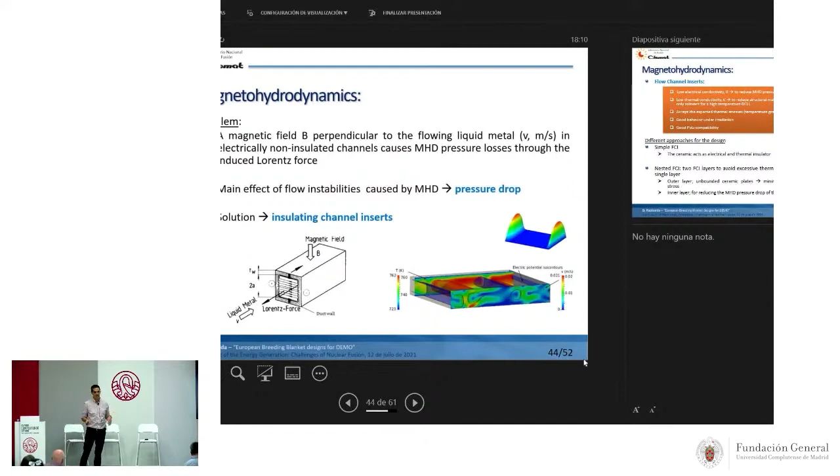And the solution that was found in the past 20 years ago to solve or to mitigate this problem is the introduction of insulating channel inserts. These flow channel inserts have these main requirements. The first one is to have a low electrical conductivity, to have low thermal conductivity, to accept high thermal stresses, and of course to present a good behavior under irradiation.

We have different approaches for the design. You can see, maybe you cannot see quite well, but in green you have the liquid metal, in gray is the structure, and in white you have the flow channel insert, which separates the liquid metal from the steel. In this case, the ceramic acts as electrical and thermal insulator.

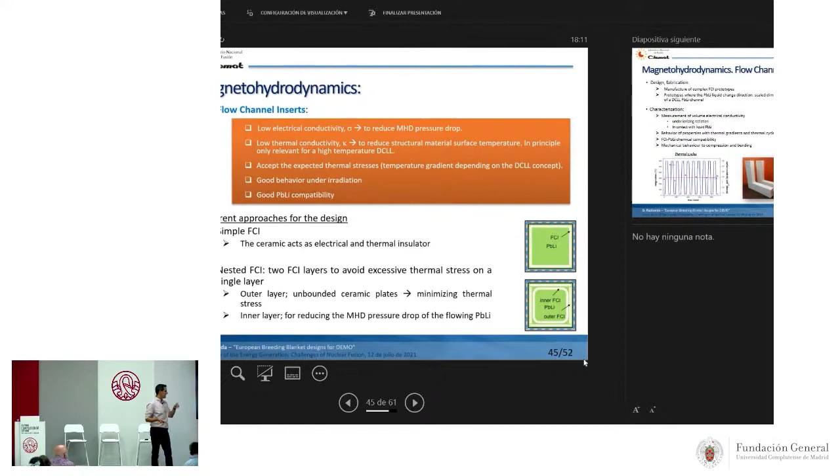We have another possibility, which is using 2 layers of flow channel insert. The outer layer, which is this one, is composed by different layers, unbounded ceramic plates to minimize the thermal stress, and the inner layer is to reduce the MHD pressure drop.

What we are doing in CIEMAT is to design and fabricate these important components. We manufacture complex flow channel insert prototypes, as you can see here in these pictures. And we also characterize all these prototypes in terms of electrical conductivity, the mechanical properties, the compatibility with the liquid metal, that is corrosion, and the mechanical behavior.

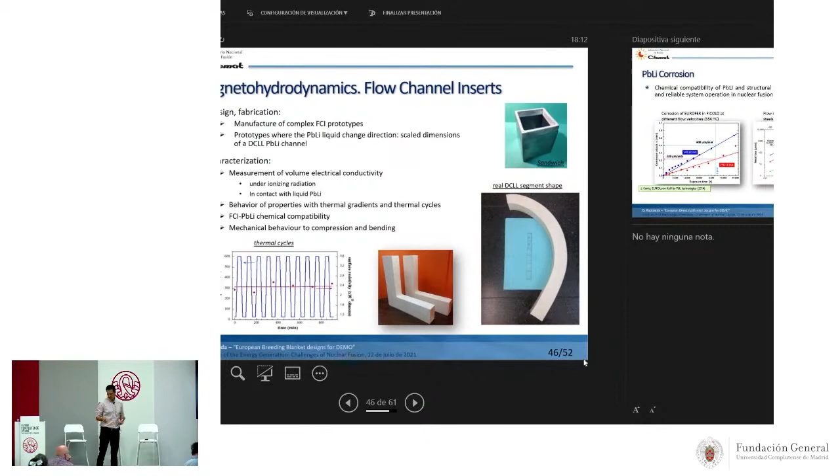Corrosion. Another important point is the chemical compatibility between the liquid metal and the structures of the blankets. This is not a particular issue of the DCLL. This is an issue for all the concepts using the liquid metal. In this case, we need a low corrosion to have a safe and reliable operation.

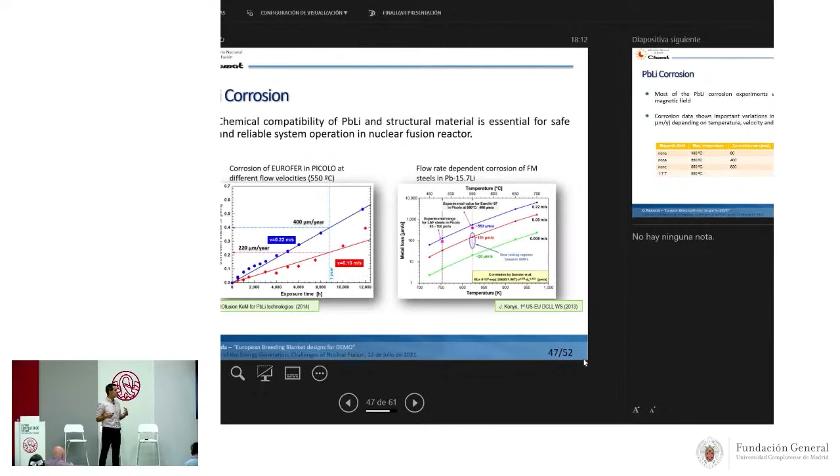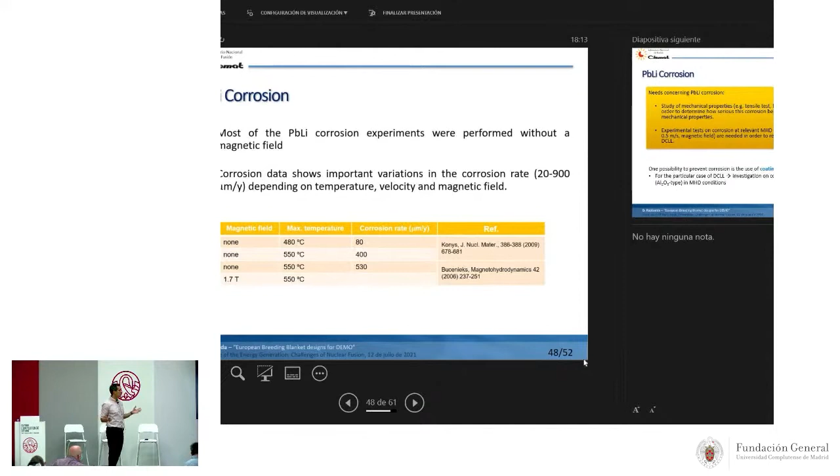However, most of the experiments on corrosion have been performed without a magnetic field. And as you can see here is a small example, but what is important to say is that this data presents a very large scatter in the results. So we need additional experiments to confirm all the behavior of corrosion with the materials.

So, needs concerning the corrosion due to liquid metal. We need to study the mechanical properties in order to determine how serious this corrosion behavior acts on the steel. And of course, we need experimental tests on corrosion at relevant conditions, that means at high velocity and high magnetic fields. And of course, in CIEMAT, we are working on that.

And one possibility to prevent corrosion, and this is one important part of the experimental program, is the development of coatings. And for coatings, we are investigating alumina and silicon carbide.

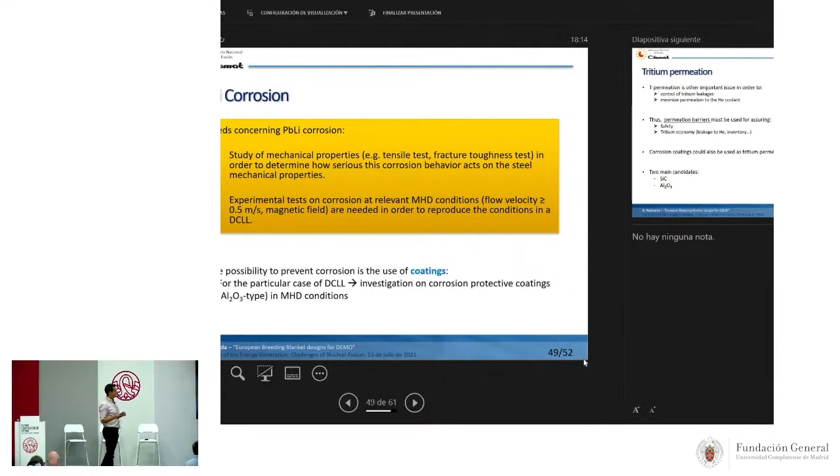Tritium permeation. Tritium permeation is another important issue for the blankets in order to control tritium leakage, because remember, tritium is radioactive and we don't want that permeates to the environment. And of course, to minimize the permeation to the helium coolant, also for tritium economy, because we want the self-sufficiency. So at the end, we have to maintain all the inventory of tritium well controlled.

What we are thinking is to use the coatings for corrosion also as anti-permeation barriers, because at the end it's ceramics, and these ceramics can act also as anti-permeation. And for that reason, we are studying also the silicon carbide and the alumina coating.

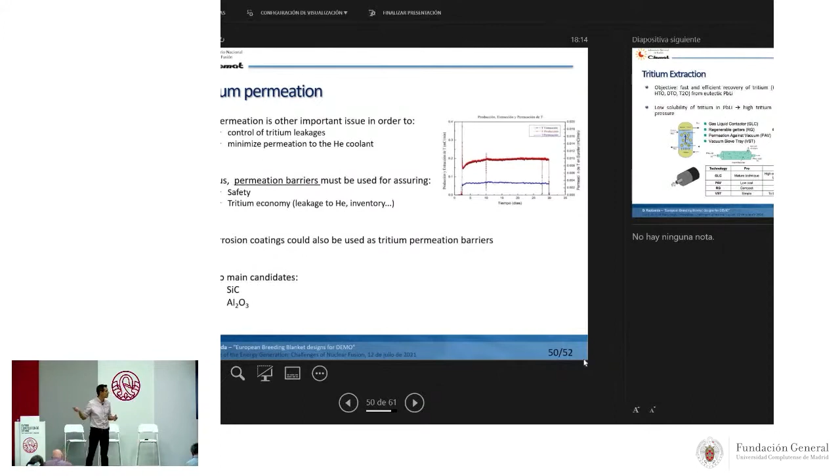And finally, the last issue I wanted to mention is the tritium extraction. Remember that our main objective is a fast and efficient recovery of tritium in all these forms from the eutectic lithium lead. And for that, we are investigating different techniques, the gas-liquid contactors, the permeation against vacuum, and so on. And in CIEMAT, we are also studying these properties in dedicated liquid metal loops.

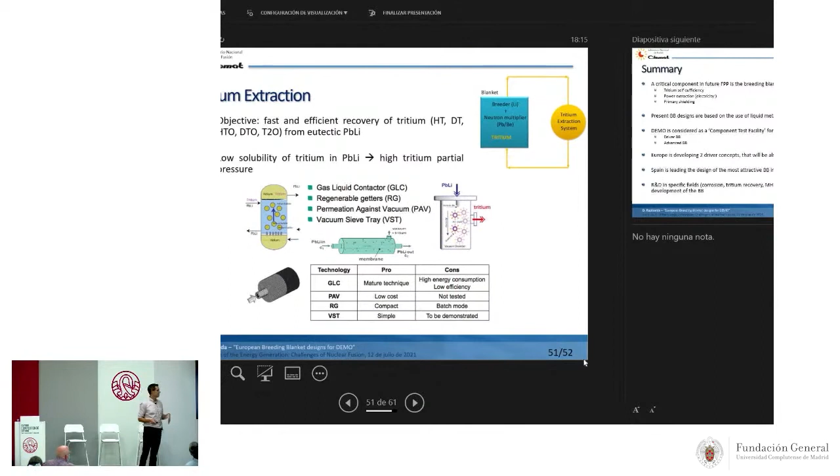So, summarizing, and this is the end of my presentation, a critical component in future fusion power plants is the breeding blanket, which has to assure the tritium self-sufficiency of the reactor, the power extraction to produce electricity, and is a primary shielding for the vacuum vessel and for the coils.

The present breeding blanket designs are based on the use of liquid metals or lithium ceramics. And right now, DEMO is considered as a component test facility for the breeding blanket, and for that reason, we will have two kinds of blankets to test: the driver blanket, HCPB, WCLL, or the advanced blanket that in some way could be the DCLL.

And these driver concepts are the same concept that we are testing also in ITER as TBM, the HCPB and the WCLL. And Spain is leading the design of the, for me and for a lot of scientists, the most attractive breeding blanket for the long term, the most attractive blanket to be installed in a future fusion reactor. And of course, we are still working in some specific fields for R&D, corrosion, tritium recovery, coatings, and so on, for the development of the breeding blankets.

Thank you very much, David. Really, I think it was a very clear, comprehensive talk, where you summarized the key points with details and also prepared us for deeper understanding by each one of us. So you really made the full list of TBMs, details of the TBM, and all the items. Some more detailed, the basic part, some just for reading by ourselves, which is another important part in these courses.

So it's now the time for questions. I have several, but I give the floor first to some of our people in the course. This good friend of mine is making me do a lot of exercise. Please, go ahead.

Okay, thank you very much. Indeed, it has been very illustrative for me as well. Just a couple of questions, maybe it's useful for everyone. When you talk about HCPB, the helium cooled, and then the WCLL, water cooled, what is the main difference? What is the main advantage of using helium instead of water for the pebble bed?

Yes, this is a very good question because, okay, the water-cooled lithium lead, the main advantage is that it uses technologies that are already available in fission reactors. This is the main important point for the WCLL. The WCLL was studied years ago in Europe, also in the US, and was discarded for several reasons. The main reason is safety, because the problem is tritium retention by water, which is a critical aspect, okay?